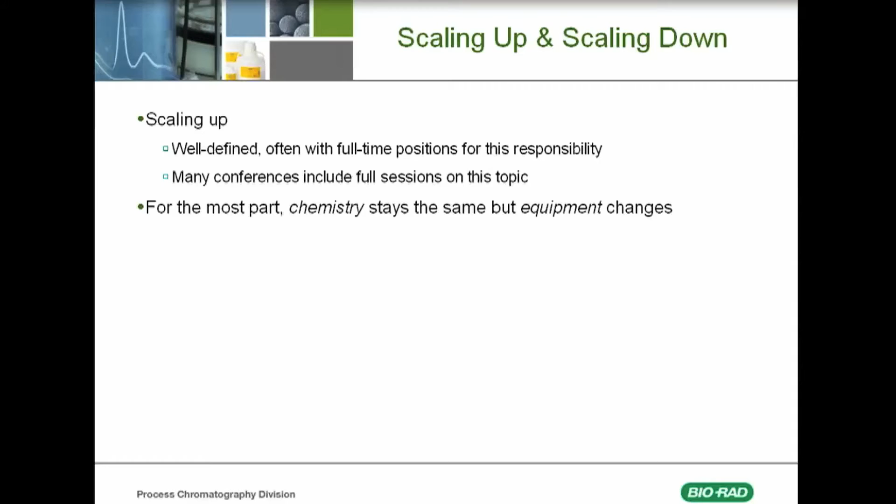And let's get started. So basically, scaling up and scaling down are two things that are very important in process chromatography. And so scaling up is actually very well defined. There's a lot of full-time positions at companies for this responsibility for process transfer. And a lot of conferences actually include full sessions on this topic. So for the most part, the chemistry stays the same, so the resins and the buffers are going to stay the same, but the type of equipment is what changes.

Once the manufacturing scale is licensed, the small scale needs to mirror the production parameters. This is used for discrepancy investigations and validation, life cycle validation, viral clearance validation, all of these things that are done for process chromatography. So any changes that are made at manufacturing scale need to be appropriately scaled down for troubleshooting and continuous improvement. But a lot of times the procedural differences are overlooked. This is because we know that the chemistry stays the same, and so we don't necessarily look at the procedural changes that need to be made between laboratory scale and process scale.

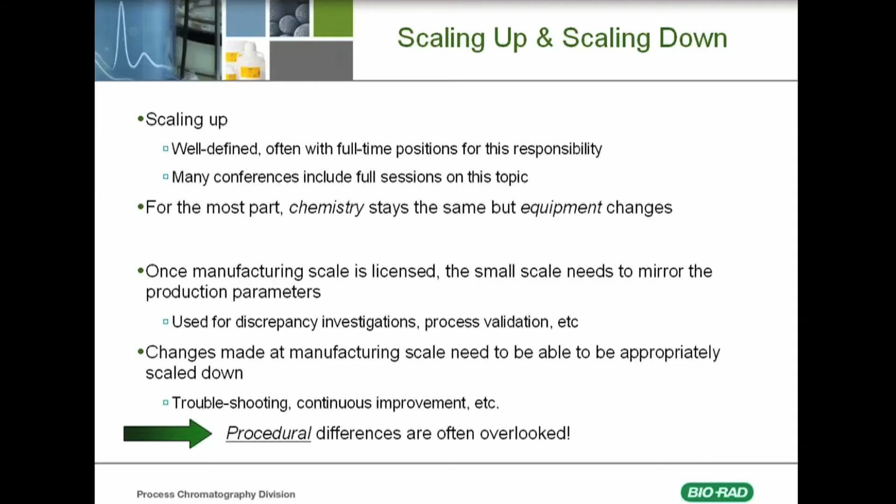But if we look at the differences, so this is scaling up from laboratory scale to pilot scale. We see laboratory scale is generally in the diameters of about 0.5 centimeters to 5 centimeters. This is always an open column system, meaning that you have to take the top flow adapter off and pour the resin in. You usually do flow packing and then just manual compression. When you get to pilot scale, this is up to about 20, maybe a little bigger, centimeter diameter, depending on the size of your process and how many kilograms you're processing at a time. But the procedure is essentially the same. You have to take the top off and pour the slurry in and do flow packing with manual compression.

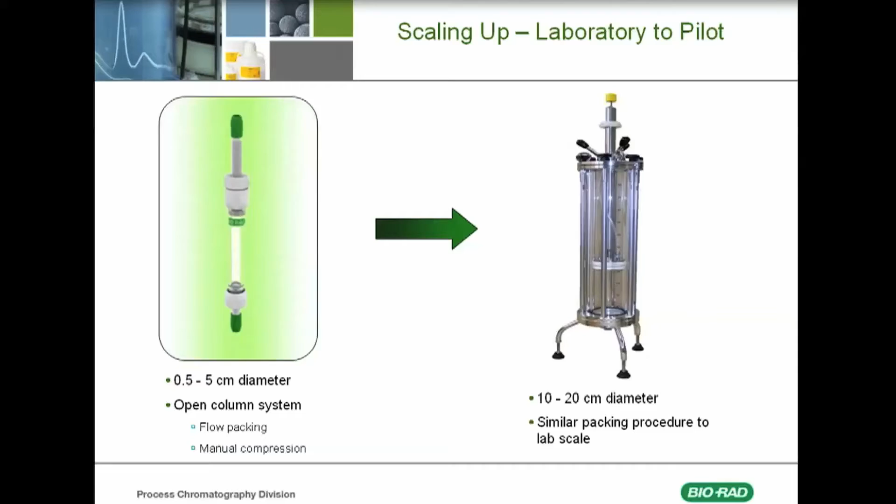So on the left we have the same thing. You have a little bit bigger pilot scale. It's still an open column system. But then when you get to manufacturing scale, you can get up to 2 meters in diameter. And at this scale, you're going to typically see pack-in-place technology, which means that the top piston is not removed. This is for a number of reasons. It can be very heavy. Oftentimes you need a hoist for that, and a lot of companies don't have hoists in their manufacturing area. Also, a lot of times people want closed systems, so you don't want to be taking the top off in a processing area.

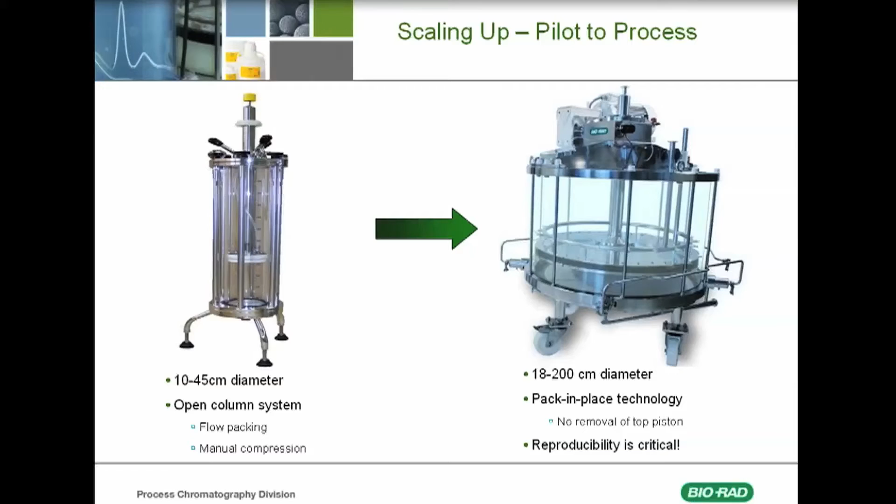The second issue with process scale is that reproducibility is really critical. It's less critical at pilot scale and laboratory scale because you're only doing a few runs. So the bed may not need to be stable for that period. But at processing scale, you're looking at doing anywhere from 10 to 100, sometimes 200 runs on a single pack of a resin. So reproducibility is very critical at this point.

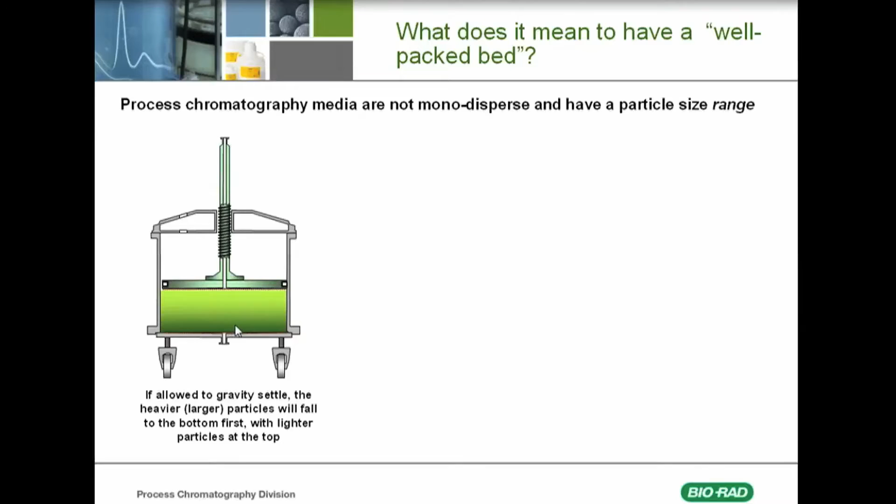So what does it mean to have a well-packed bed? Well, as we know, the media that's used for process chromatography is not monodisperse. So there's always a range of particle sizes. We have heavier particles and lighter particles. So if these are allowed to settle, the heavier particles will fall to the bottom. And you can see this is a slightly darker shade here on the bottom, and the lighter particles on top.

The flow direction for most process columns is going to be in the axial direction. Axial means it's up and down rather than in the radial direction from side to side or from the center to wall. So if we're doing upflow at any point, some of these particles can shift and you can have movement within the bed if it's not well packed.

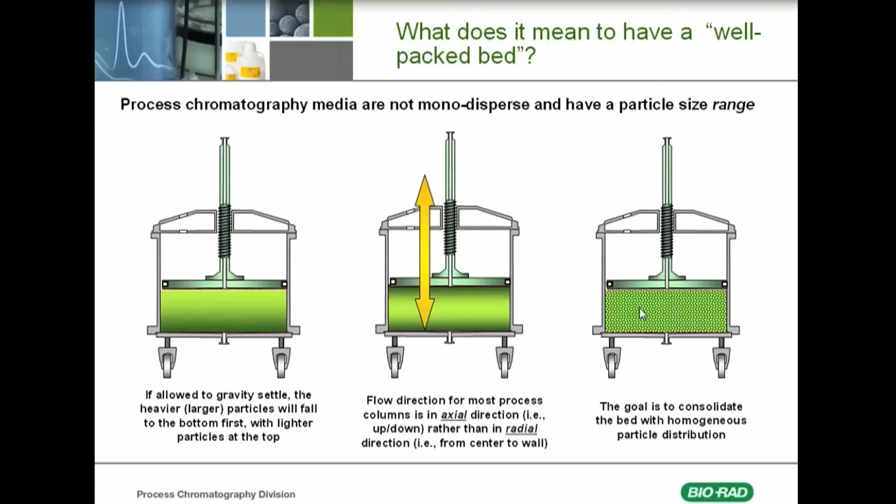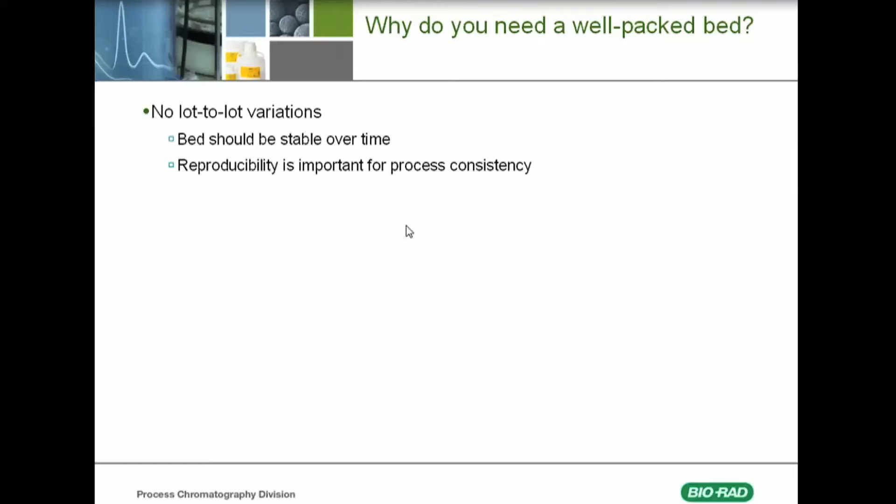So what does it mean to have a well-packed bed? Well, the goal is to consolidate all of the media so that it's homogeneously distributed between the top and bottom and from center to wall. So why do you need a well-packed bed? Well, as we said before, reproducibility is important for process consistency. You don't want lot-to-lot variations, and you don't want packing-to-packing variations. And you want that bed to be stable over a long series of cycles.

You also don't want further compression during operation. So during the buffer cycling, or the cycle that you use the column for, you can have swelling and shrinking of the beads. If you have high salt buffers, or if you have ethanol, this can cause changes to different types of media. Also, the higher viscosity buffers, like the sanitization, the high 1 molar sodium hydroxide, can cause further compression. And so when you have the further compression, the bed then relaxes, and it can cause some variations in the packing density, or the homogeneity of the packing.

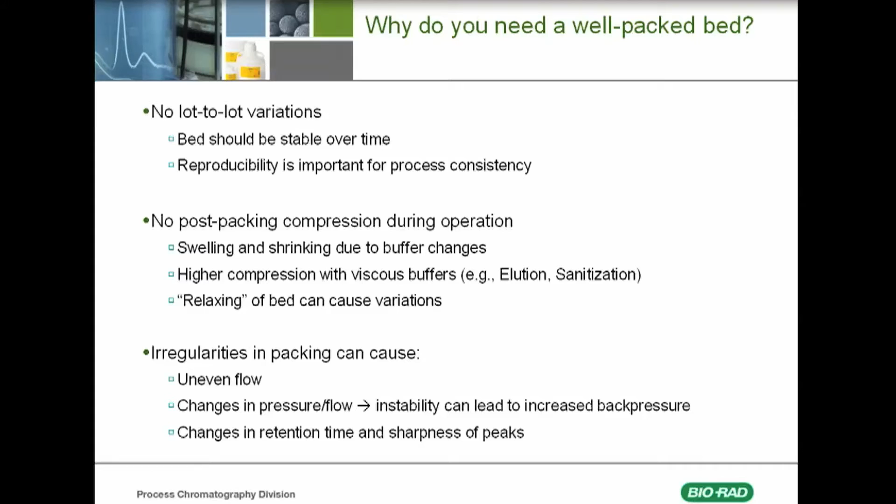The irregularities in packing can also cause uneven flow, and any changes in flow can lead to increased back pressure, which can be a problem, especially at process scale when we're typically working at fairly low pressures. And it can also lead to changes in retention time of an elution peak, and also the sharpness of the peak. So all of these issues can lead to changes in product yield and product quality. And we know that consistency is by far the most important thing in manufacturing.

So why is column packing for manufacturing considered so difficult? Well, I think by virtue of how many people we had sign up for this webinar today, it's something that's not very well known. It's not done very often. Usually it's only a few times a year, hopefully. You're not having to pack a column before every lot. There's usually very little experimentation because you're in a GMP processing area, so your quality groups and your regulatory groups aren't going to let you just have free rein for experimentation. Also, media is pretty expensive, so you can't just be doing packing studies on media and then throwing it away. You want to be able to use it.

So because of these reasons, column packing for process chromatography is often considered an art. And in almost every article that you read on column packing for manufacturing, you're going to see this phrase: it's often considered an art rather than a science. So there's usually only a few people in the company, if at all, that really have an understanding of column packing.

And if you have any constraints at all, if you have a different type of column, or maybe the ceiling height in your processing area is a little lower than what you would like, the equipment footprint, how big your pump is, the range of flow rate, all of these things that you may not have what the vendor considers ideal for packing. So you may have to make some modifications. Finally, there's a lot of new types of media that are out on the market now, and the base bead really can make a difference as far as how to pack. So there's no universal procedure for packing chromatography media in general.

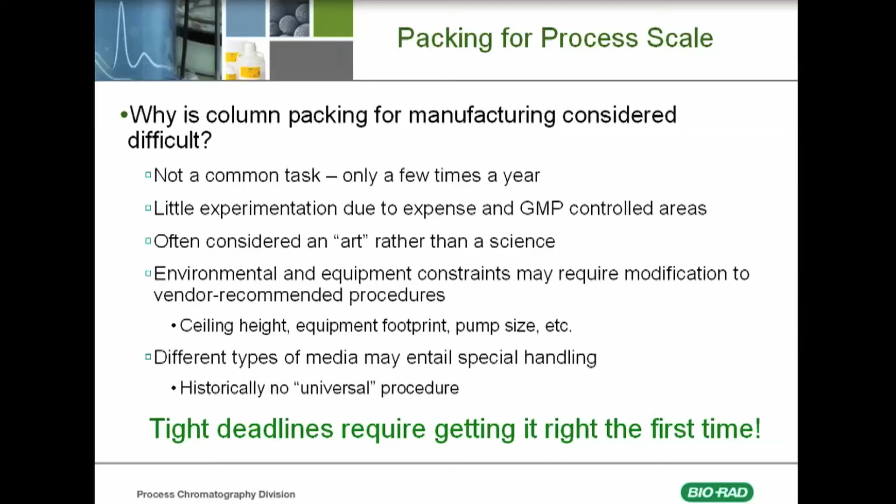Finally, tight deadlines always require getting it right the first time. So this is often overlooked when you're getting ready for your processing. You've got everything in place. You've got your buffer validation done. You've got your elution profiles that you need to look at, and you save the column packing until the last minute, and it needs to get done right the first time. You don't have time for repacking.

So how do you get a well-packed column? Well, there are a lot of equations and theories and publications that discuss the science of packing, like I said. A lot of these are academic in nature to understand the physics of column packing. In fact, a lot of these articles that you can find are actually in regard to HPLC columns, where it's very critical to have a well-distributed bed, but it's also not necessarily helpful when you're talking about packing a column in a manufacturing area.

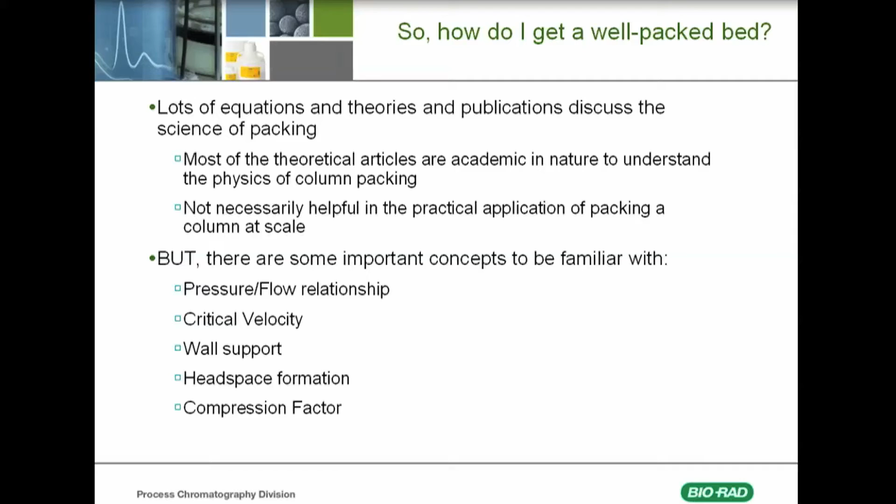But there's a few concepts that I do want to go over so that we're all sort of on the same page. A little bit of this might be old news to you, but some people may be seeing this for the first time, so I want to make sure that we're all on the same page. We want to talk a little bit about pressure flow, what critical velocity is, what is wall support and what does that mean, and then headspace and compression factor.

Now, this is typically done by your manufacturer. You don't want to be doing this in your processing area to find out what the critical velocity is in your column on your equipment, and the reason for that is for a lot of media, the high back pressure can cause irreversible damage. So this is typically done by a media vendor in order to know what the critical velocity is.

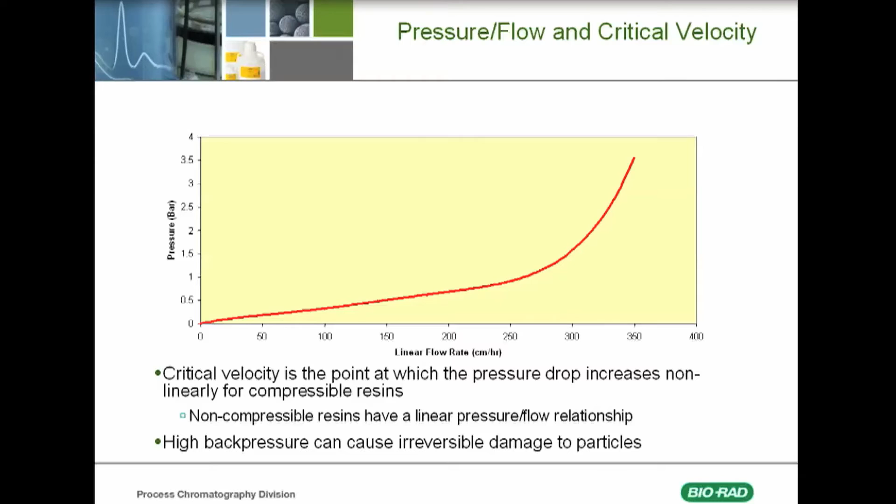This is a study that was done a number of years ago, over 10 years ago. It's referred to a lot, by Stickel and Fotopoulos. And what they showed was that as you increase the diameter of the column, you decrease the wall support. So that means in a small column, laboratory column, there's more surface of the media that is in contact with the wall. Now the wall provides support, and so actually you have better pressure flow attributes at smaller scale than you do at larger scale.

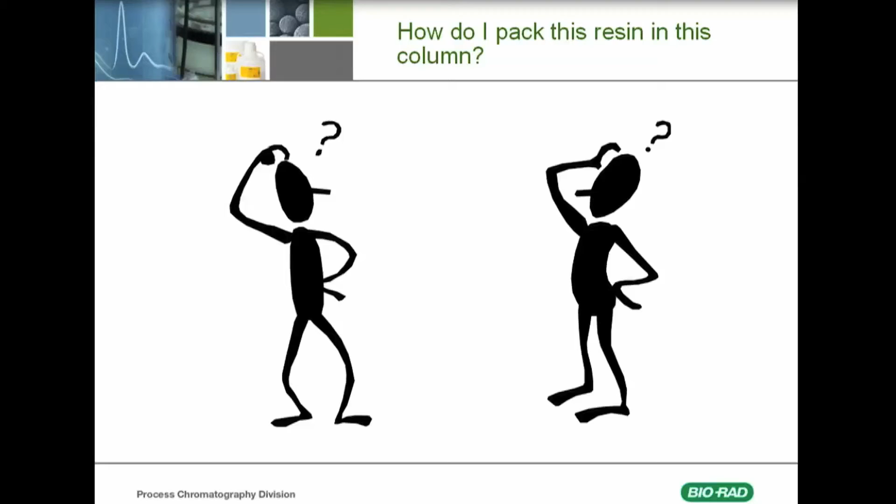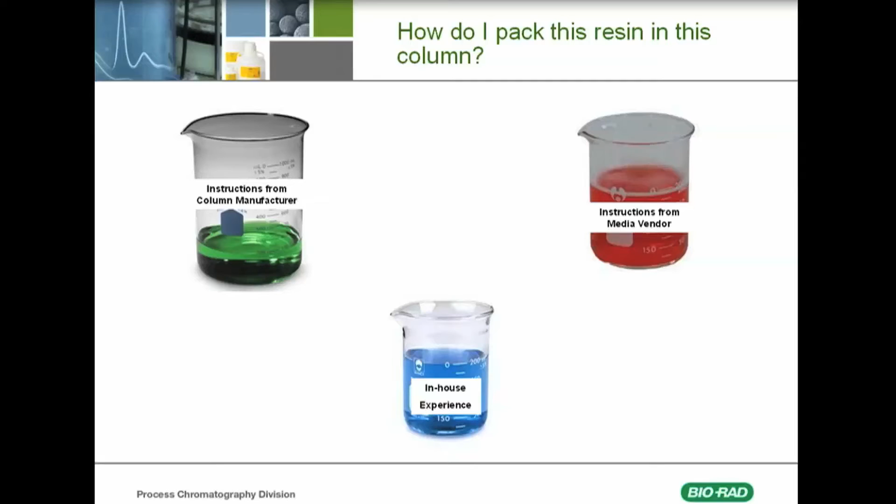So how do I pack this resin in this column? You're scaling up, you've got a piece of equipment, and you've got some resin. Well, you typically take whatever instructions you get from the manufacturer of the column. Usually the media vendor will have some advice for you as far as how to pack that media in a production scale column. And sometimes you've got a little bit of in-house experience, somebody that's packed a lot of columns at the manufacturing scale. And you mix those all together.

And you cross your fingers, and then you hope that you get a procedure that works right the first time. Well, that doesn't often happen. It takes a lot more preparation than that. So historically, what companies have done is they've used flow consolidation. So you hear this a lot, and in my research for this presentation, I found a lot of different types of advice.

So some companies say shoot for up to 3 times the maximum processing flow rate. So let's say your load is being done at 200 centimeters an hour. Well, now you've got to pack your column at 600 centimeters an hour. Some of them say 85% critical velocity, or anywhere from 65 to 90% of the critical velocity.

Well, you don't know what the critical velocity is in your manufacturing column unless you actually do the pressure flow curve. And like we said, sometimes that can damage the media. So it's not recommended to really do that in your column. There's also recommendations to use a pressure set point to compress the bed. So you often see, make sure that you use 4 bar while you're compressing the bed.

Finally, you also see packing in buffers which can cause maximum shrinkage. So for a lot of media, ion exchange media, typically 2 molar salt is a buffer that will make the beads shrink the most. This is so that you're packing it as tightly as possible. And when it goes into a different buffer, like an equilibration buffer, and it swells, then it's not going to produce any headspace.

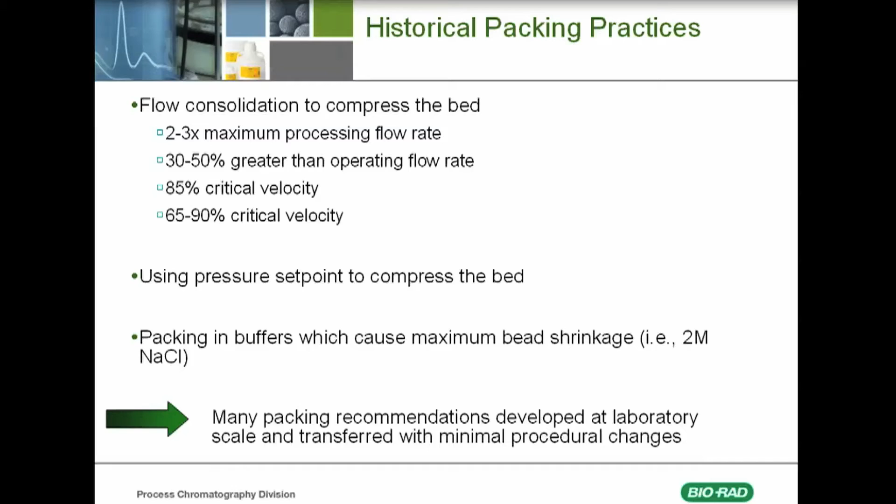Well, a lot of these packing recommendations are actually developed at laboratory scale and then transferred with minimal procedural changes because there's very little understanding of what the dynamics are at process scale.

So in flow packing, which is probably the most commonly used, especially for pilot scale, we're just going to go through this very quickly. I'm sure many of you have already performed this type of packing, but you take the top flow adapter off, and you just pour the slurry into an open column. And then once it starts to settle a little bit by gravity, you put the top adapter back on, and then you consolidate by flow.

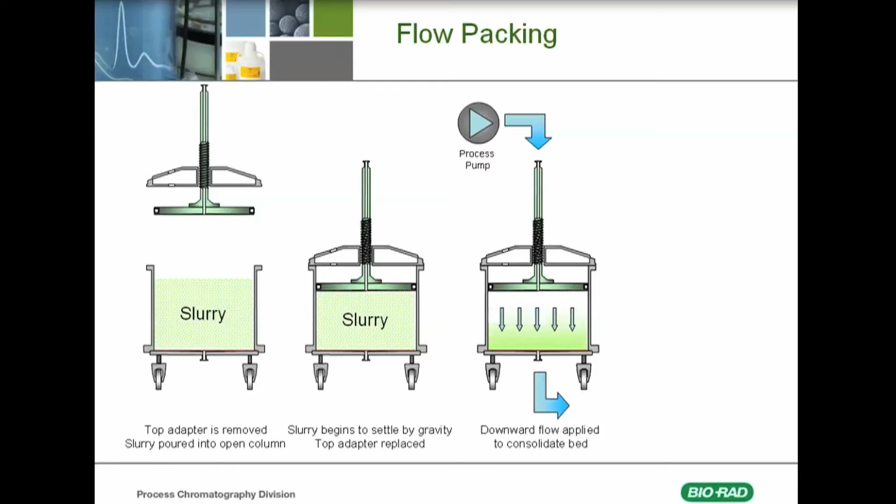So you have a process pump. It's usually a type of skid, or sometimes you can use just a separate pump, and you apply downward flow in order to consolidate the chromatography bed. Finally, you move the piston down. It's usually done manually with a hand crank, and it often requires several cycles. So sometimes you have to apply flow and then lower the piston, apply a little bit of flow, lower the piston, and it needs to be done in several cycles. It's rarely done in one step.

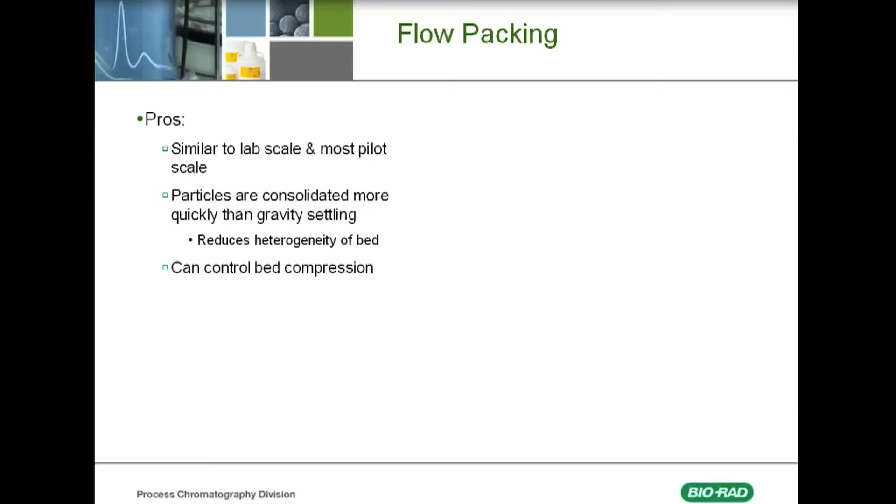So what are the advantages to flow packing? Well, it's very similar to lab scale, and most pilot scale is performed this way. In general, you have a more homogeneous bed than if you just let the particles gravity settle, and you can control the bed compression. So there's some good advantages. There's also a lot of disadvantages.

So for instance, as we discussed earlier, it's very difficult to remove the top piston when you get to the larger scales. Like I said, you may need a hoist, or you may need several strong people to lift that top, and then strong people to put it back on. Also, you have the gravity settling that happens in the meantime, which can cause some heterogeneity in the bed.

As we said, if you're using 2 to 3 times the maximum processing flow rate, up to, let's say, 600-700 centimeters per hour on your column, most skids that are made for a certain processing range aren't going to be able to go that fast. So you may need a larger pump than your processing pump.

The other issue is that when you get to these higher flow rates, you can get much higher back pressure. So in the example that I showed earlier, the critical velocity was reached at 250 centimeters an hour; for some resins, the critical velocity isn't reached until well over 1,000 centimeters per hour. So I don't know very many companies that have pumps that can operate at that speed. It's pretty rare.

Next issue is that some of the flow adapters for these types of columns are optimized to have evenly distributed flow when it's close to the bed. So it needs to be close to the bed in order to have nice uniform flow. If it's not close to the bed, usually you'll have more flow coming from the center where the central distributor is.

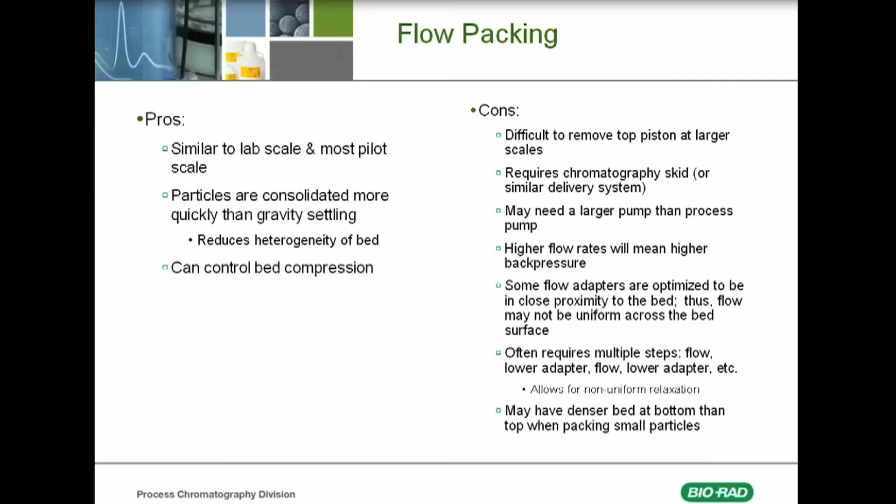So the next type of packing that was introduced at process scale when columns started to get bigger and bigger is stall packing. And this is probably well known to a lot of the people that are attending. It essentially involves having a fixed height adapter. So you start with the piston in place at its bed height. So if you want to pack to a 20 centimeter bed, for instance, you would set the adapter to 20 centimeters. You have a slurry tank, and it's attached to a diaphragm pump and a pressure gauge. And there's generally two different ways to introduce slurry into the column.

You can go through the bottom or through the top. In this example, I have the slurry tank and the diaphragm pump attached to the bottom. And there's a central nozzle that comes up out of the bottom of the column or out of the top. And then the slurry is pumped through the diaphragm pump, while the resin is trapped by the frit, and the fluid or the flow comes out the top.

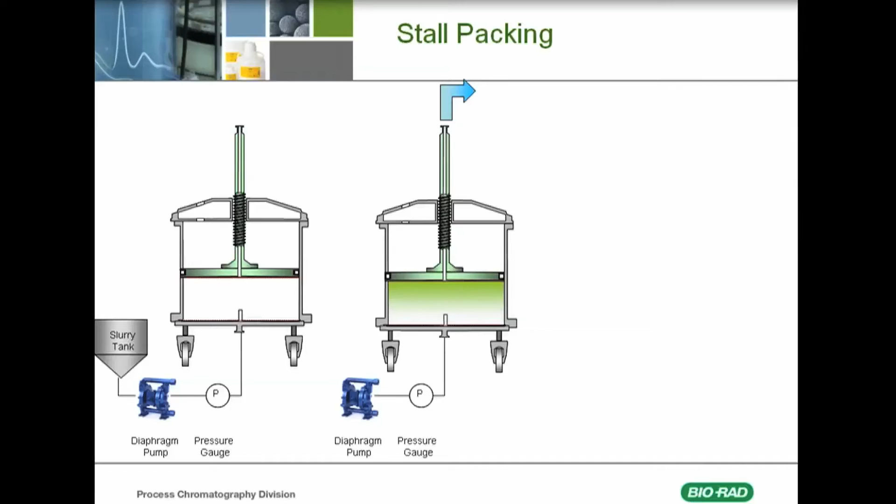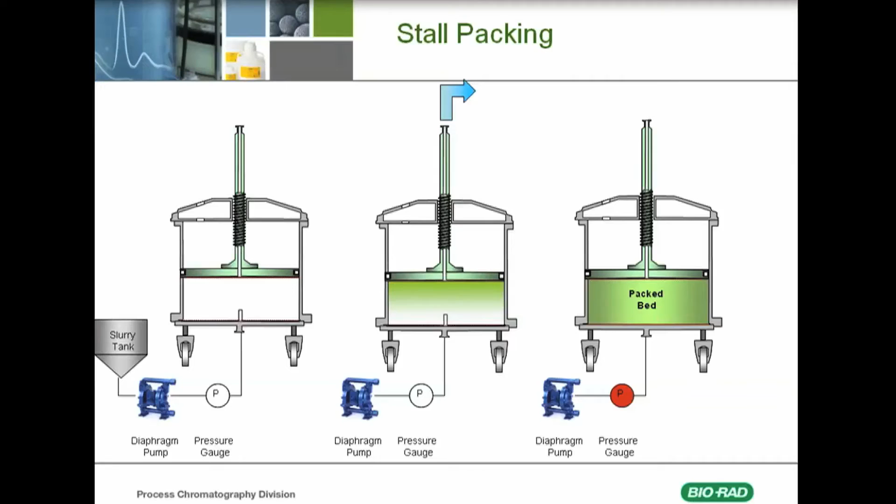It's often done from bottom to top in order to be able to remove any air that may be entrapped under the frit. So this is usually the most common type. And then when the pressure gauge overpressures, you know that you have a packed bed. This is the general type of stall packing. There are some variations, but this is just the general method.

So there are some advantages to stall packing. As we said, it's generally a fixed bed height, so the column tube height is limited. That means that you don't really need a very tall ceiling in your processing area. It's only one packing step, so you don't have the multiple flow, lower the adapter, flow, lower the adapter, etc. It's only one packing step, and that can be automated.

The packing pressure, so the pressure at which you set the pressure gauge to overpressure, can be varied depending on what the media characteristics are. So if you have a media that needs to be tightly packed, you can go to a higher packing pressure than one that doesn't need to be, that has a lower compression factor. It's a really fast process. If you've ever done this, it's generally like 5 minutes or less because it uses a very high velocity.

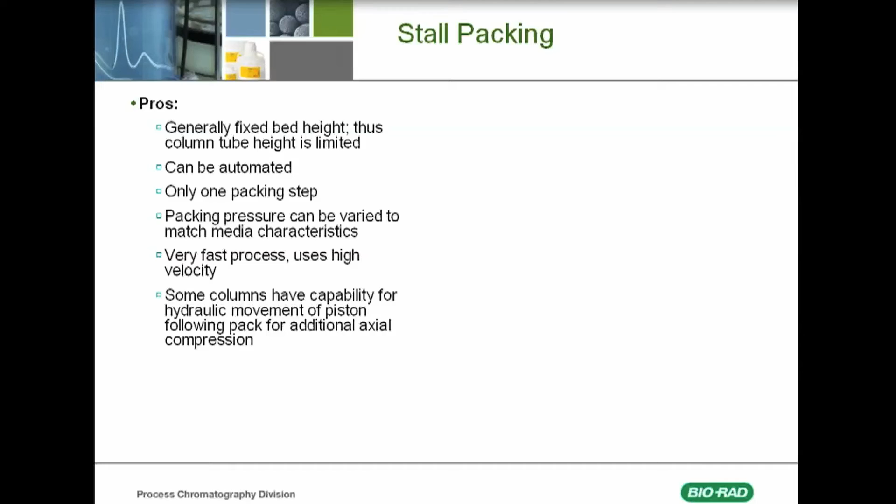Some of the more recently designed columns within the last 5 to 10 years have the capability for hydraulic movement of the piston following the pack for additional axial compression, but this is generally kind of clunky. It's not very precise, and it's not very smooth for the most part. But you can do additional compression.

So what are some of the disadvantages? Well, it doesn't scale very easily. Actually, since you have that central nozzle delivering media to the sides of the column, a lot of times there's very big differences seen between, for instance, a 45 centimeter column and a 60 centimeter column, which is not a very big difference in scale, but can really change your packing procedure.

The diaphragm pumps can also cause some damage to the media, not necessarily one time through the diaphragm pumps, but a lot of these procedures for these types of columns call for recycling the slurry through the diaphragm pump in order to prime the lines. And for some media, this can be damaging and can cause fines.

For stall packing, you also need to use a pretty thin slurry, usually less than 30% for this type. And so that means you need a larger slurry tank and more buffer, which generally just means more money and more footprint in your processing area. You also need a media overage, so you can't deliver the exact amount. Most procedures call for 5 to 10% media overage, and the media can cost a lot more than the column itself. So this can be a problem for companies that are trying to economize.

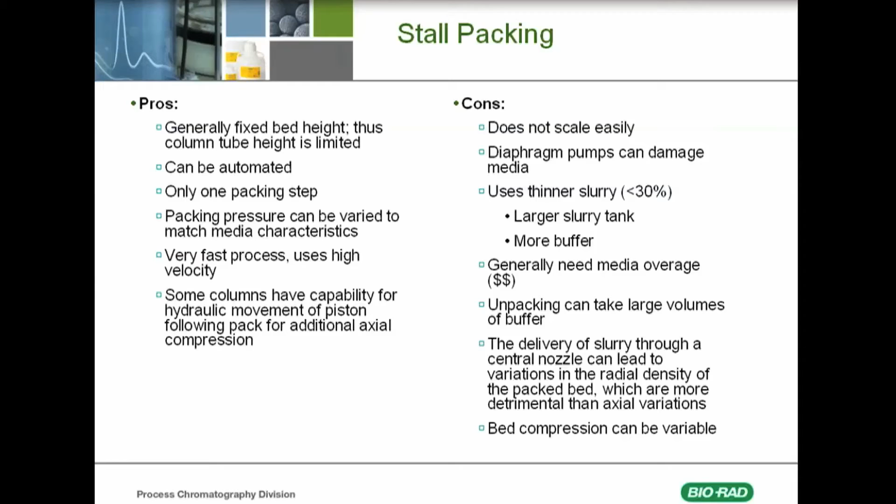One of the most important things is that the slurry is going through a central nozzle, and so it's delivering from the center out to the sides, the walls, and this can lead to variations in the radial density, which is from center to wall. These are far more detrimental than any variations in the axial density of the beads, and so if you can imagine, if you have a void somewhere in that area or a denser region, those can all cause shoulders or double peaks, things like that. Finally, the bed compression can be really variable, and I'm going to explain why that is.

If we look at the next slide, this shows us the difference between consolidating a bed with constant flow versus constant pressure. So on the left-hand side, if we have the same flow, we see that the pressure is changing the whole time until it evens out. So the pressure starts off very low as the bed is consolidating at the bottom. The bed is just starting to build, and as the bed grows from 1 centimeter, 10 centimeters, the higher the bed height, the higher the pressure. So even though the flow is the same, the pressure is increasing the entire time.

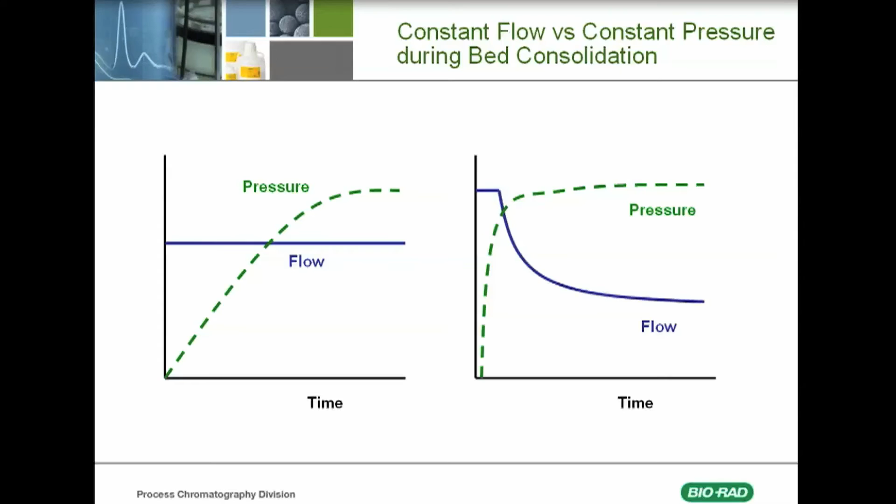On the right-hand side, what we see is that as you increase the pressure, as you maintain the pressure, the flow is going to decrease. So it's the same principle, it's just that as the bed is consolidating or as the bed is compressing, you'll see a decrease in flow.

So what have we found? The packing by pressure is actually not very reproducible. First of all, it doesn't transfer well from lab to process scale. As we see with wall support changes, the back pressure is going to change pretty significantly in some cases. So you can't transfer a process of packing by pressure from laboratory scale or even pilot scale to process scale. This is going to give you some differences in compression and differences in back pressure. There's a lot of other factors that can influence back pressure.

The particle size distribution is actually really important, and what we see on the right is the effect of particle size. Now, as I said, most process chromatography media has a particle size range for the distribution. And so even though the mean particle size might be 50 micron, that mean might be 47 or 52 or anywhere in that range. And the actual range of the particle size can be huge. It could be, let's say, 30 to 70, for instance, or even bigger.

So a very small change in the mean particle size, on the right we see 50 micron, and on the left in the pink we see 45 micron, actually has quite a big impact on the back pressure at the same flow. We see at 300 centimeters an hour, it's almost twice as great for this particular resin.

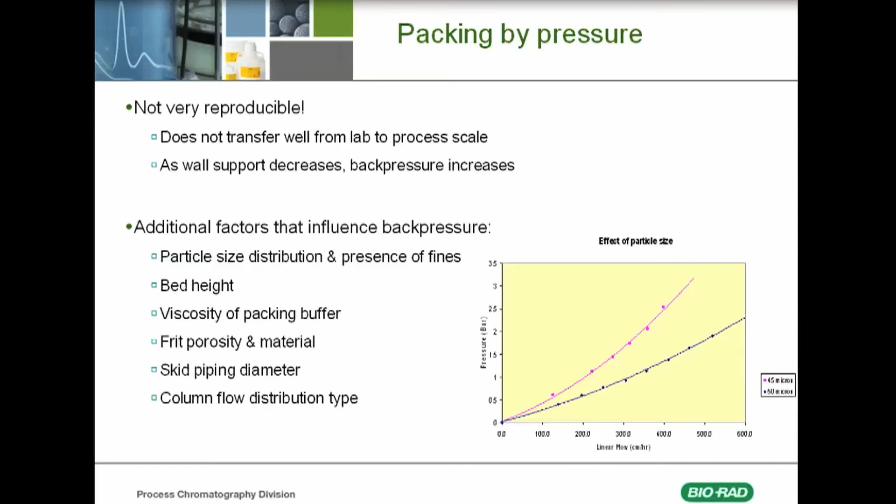The skid piping diameter, so the skid that you're attached to that's doing the flow or the pressure packing, can change from small scale to large scale. And also the distribution type, so the column flow. There's different types for different types of manufacturing columns, and that can really make a difference on your back pressure.

So with inadequate packing, we'll see further compression at higher flow rates. So we see here, starting at a little over 100 centimeters an hour, there's a little bit of headspace that starts to form. This blue line is basically the bed height of the column, which if we pack the bed to 20 centimeters and we increase the flow, we see that the bed height will decrease, down as much as 18.5 centimeters. So a loss of 1.5 centimeters, which is pretty significant. And as we said, this allows for non-uniform relaxation and can cause variations in the bed. The headspace, as we talked about, can also be caused by shrinkage due to buffer changes.

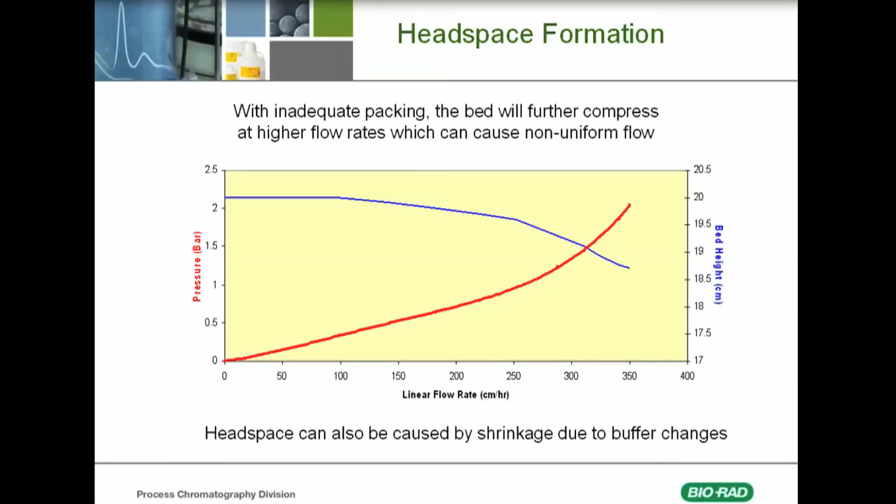So this is an interesting question, and I'm sure a lot of you have dealt with this before, but we all know how to calculate a column volume. It's just the volume of the cylinder, pi r squared times the height. So here's an example. We have a column that's 45 centimeters in diameter, and we pack it to 21 centimeters. So just by basic geometry, the column volume is calculated to be 33.4 liters.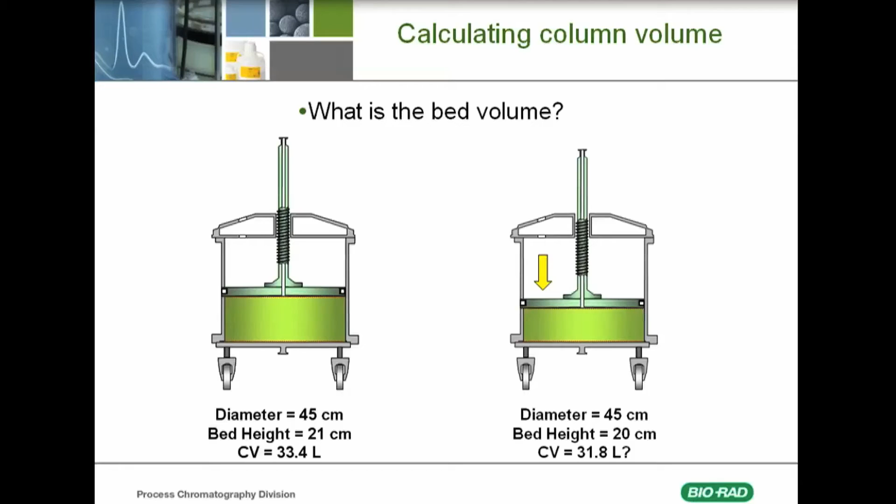Well, let's say you have some high flow, you have a little headspace, or maybe your asymmetry is tailing, and so you decide that you need to compress the bed a little bit more. So you just lower the piston a little bit. Now it's 20 centimeters instead of 21. You haven't taken any resin out. You haven't changed anything inside the bed other than the compression. But now your column volume is calculated to be 31.8. So what's accurate here? What's the most accurate thing that we can describe when we're writing in our SOPs and submitting documents to our regulatory agencies? How do we define this? It's a pretty commonly asked question.

So, is there a better way to pack the column? Well, what we've shown is that packing by pressure or flow can lead to variance in bed compression and therefore variance in the column volume. This will definitely affect your packing reproducibility and your bed stability.

Correct compression is critical. As we've shown, incorrect compression can lead to poor column efficiency, can lead to changes in your elution peak retention time, also the shape of the elution peak. It can lead to changes in relaxation of the bed, uneven flow. If you're over-compressed, that can also lead to problems because that will affect your back pressure. It might also affect your binding dynamics during processing if there's any change to the pore size on the beads.

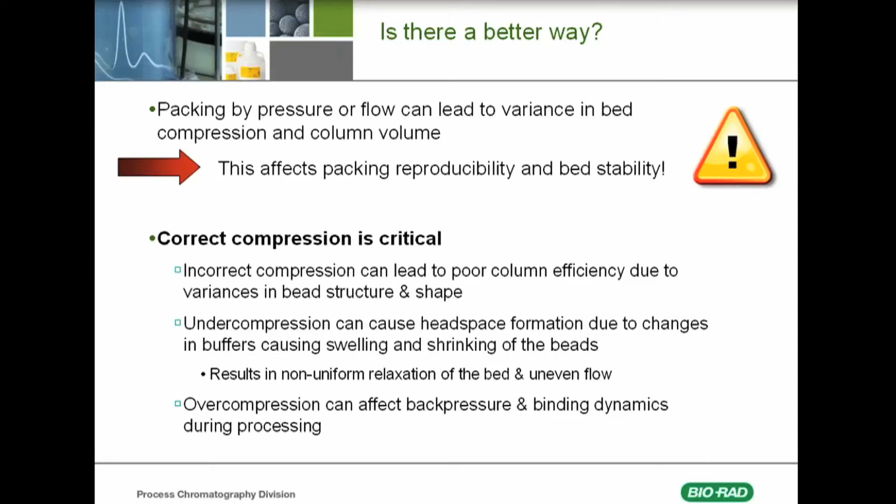So what is compression factor? Well, it's pretty simple. It's settled bed height divided by packed bed height. I usually like to remember this as SOP, or settled over packed. It's the easiest way for me to remember it, and I hope it gives you an easy way to remember it too. So, for instance, a non-compressible media will have a compression factor of 1.0. So, settled bed, 20 centimeters. Packed bed, 20 centimeters.

Anything that's compressible will have a compression factor greater than 1.0. So a lot of media is going to be in the 1.1, 1.2 range. I've seen as high as 1.6 to 1.7 compression factor, which is highly compressible media. You get this number from your media vendor, and it's usually going to give you the best performance and the best stability for a packed bed.

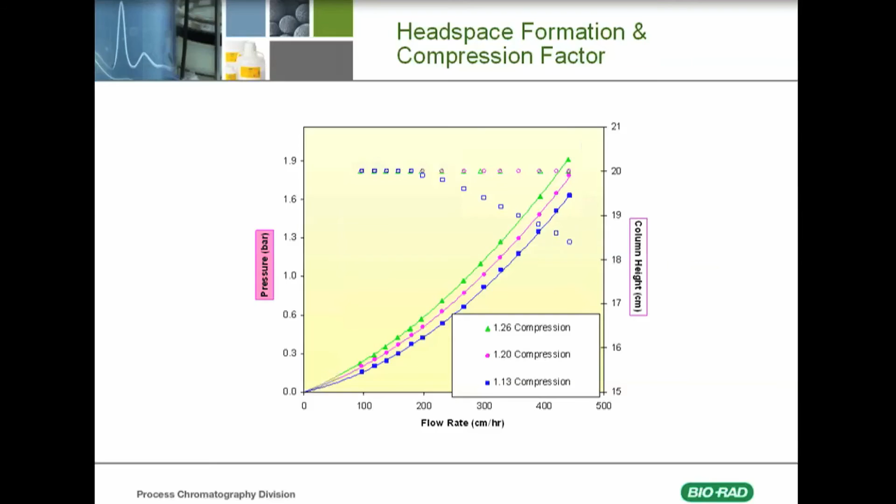Another thing to notice here is that the green curve, 1.26, gives a little bit higher pressure than the pink curve at 1.20 compression. Now there's not a significant difference in the pressure flow curve, so either one of these would be acceptable for a packing process. So in this case, you would have a range of what an acceptable compression factor is. But you definitely want to be over 1.13.

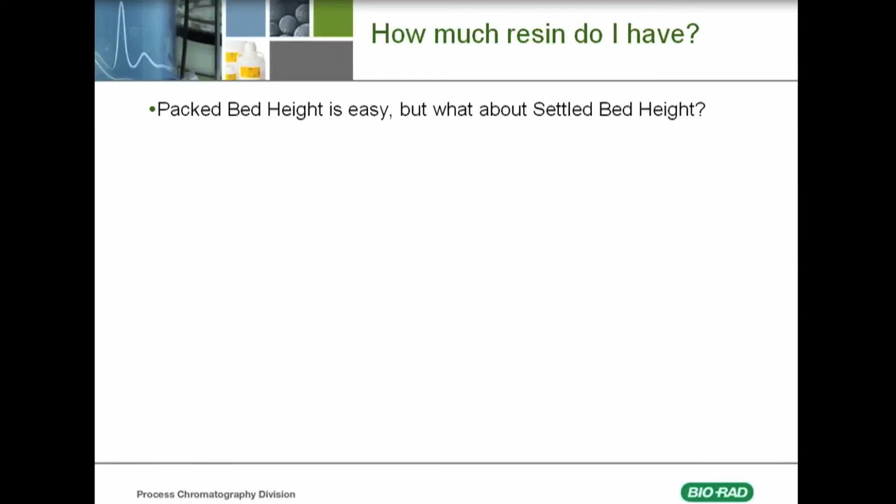So how do we calculate how much resin we have? Packed bed height is easy. As we said, wherever your piston is, that's going to define your packed bed height, right? But what about settled bed height? How do I figure out how much resin I need to put into the column? Well, using measurements from your packaging is not always accurate. First of all, most media vendors are going to put just a little bit extra into each container to make sure that they're not shorting their customers. In this case, that can result in slight overages.

Another thing is that you often have to remove whatever the shipping buffer is. So if it's shipped in 20% ethanol, that's usually not going to be your packing buffer, so you need to decant and replace with packing buffer. This might result in some loss of the slurry before you get to the packing stage.

In some cases, you may need to define the media, which means you need to take off the fines before you put it into the column. This can also cause differences in what your measured slurry volume is. So what would be ideal is if you could just transfer everything you want to pack into the column, and then you just let it settle overnight in the column. That would be ideal. Then you'd know what your settled bed height is. But it's not very practical.

There's a couple of reasons. Obviously, you'd have to repack the column. Also, you wouldn't know beforehand how much you needed to put in the column. You would just transfer what you thought you needed to put into the column. So there's a couple of different methods that are used for measuring slurry density. One of the most common is using a graduated cylinder.

So you'll take a large graduated cylinder, maybe a liter or a 2-liter graduated cylinder, and just transfer a section of the media or the slurry into the graduated cylinder, and then you let it settle. Well, for some media, this might take overnight, especially high-performance media, HP media. It can take a really long time to settle. Also, the wall support, because the graduated cylinder is much smaller, may introduce variance. Not much, but a little bit. So it's not very helpful because you don't really want to take a long time to let your resin settle.

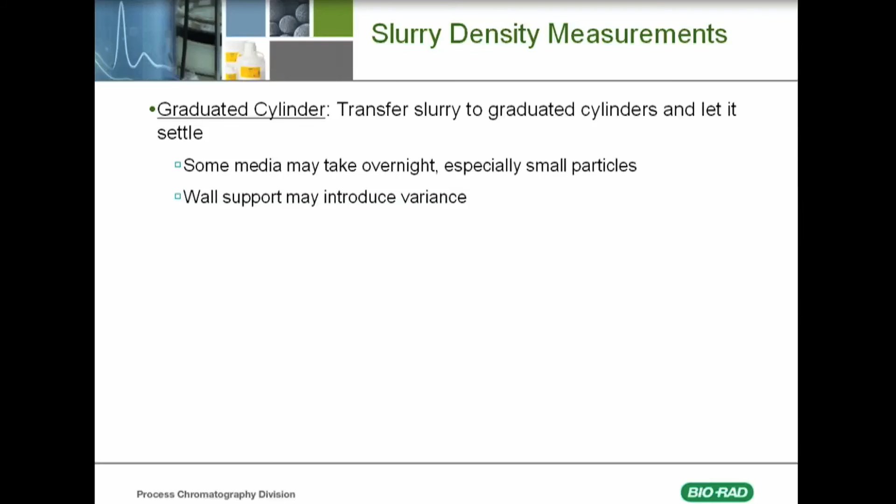There's also a method called the rebound method, and in this case what you do is you would transfer the media into the column and apply flow or axial compression. Then you'd stop the flow, allow the bed to relax, and record the rebound height. This is helpful for some media, definitely. It's clearly not possible in a stainless steel column because you can't see what the height of the bed is. It's also not predictive, as I was saying in the case of the first method. You have to transfer everything first. So if you transfer everything and you have 10 liters more than you wanted to have in there, then you've got to start over again.

It's also not very practical for highly compressive media. The media that I was talking about earlier that has a very high compression factor, once you start applying compression, you cannot stop applying compression. It really leads to big voids in the bed, and a lot of variations in flow. So it's not always accurate for some types of media. Useful for some types, but not all.

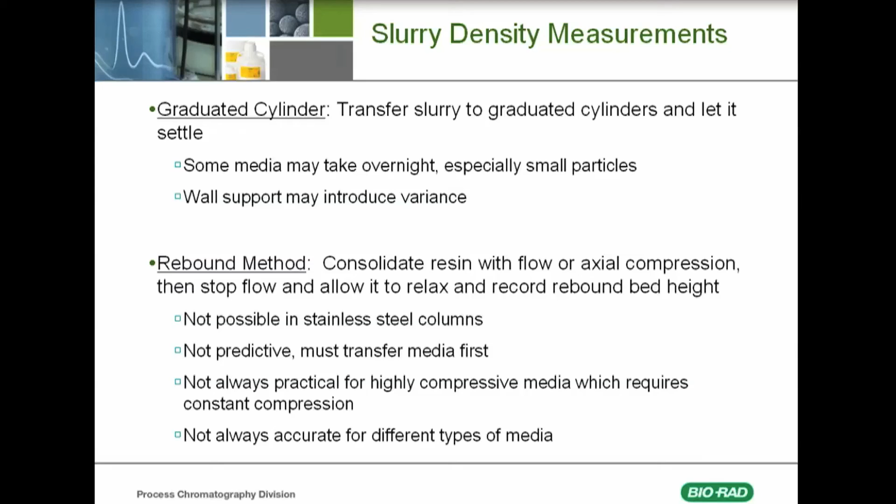There's also the centrifuge method. So what you do is you take a small portion of the slurry and put it into some spin concentrators, and then you centrifuge the liquid out. You weigh the liquid and the slurry separately on a small balance. And in this case, what you would do is convert the gram per gram percentage to volume per volume percentage. This can actually be quite accurate, but you have to do the conversion factor beforehand in a laboratory in order to correlate the gram per gram percentage to volume per volume percentage.

Finally, this also requires additional equipment in the processing area. A centrifuge is not something that's very common in a purification area, so it's a little difficult to use that across the board.

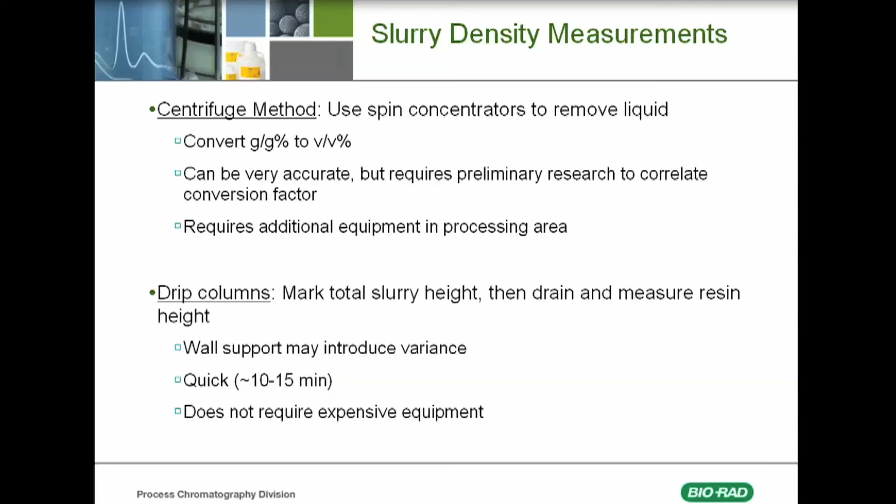One thing that we use quite frequently here at Bio-Rad is a drip column. So basically, you would take a small drip column, put your slurry in there, mark the total slurry height, and let it drain. So I'm going to show a picture of that in the next slide, but it's very quick, 10 to 15 minutes usually. It doesn't require any expensive equipment, so that's nice. You may get some variance due to wall support, but it's usually not significant.

So here's a picture of what I'm talking about. These are drip columns, so they come empty, and they come with a little snap plastic piece that snaps off the bottom here. So what you would do is dose your slurry into the disposable column, and then you mark the total height of the slurry. I don't know if you can see these little lines here where I'm marking the top of the slurry. Then you snap off this bottom piece and just let the liquid drip out. It usually takes about 10 to 15 minutes.

And when you're finished, you just measure the total height of the slurry and the total height of the resin that's left in the drip column, and divide that by the total slurry that you put in there. In this case, we did it in triplicate, so you see there's slightly different values here. This one on the left is a little bit higher, and that has to do with the sampling procedure and so forth, but you want to do it at least in triplicate.

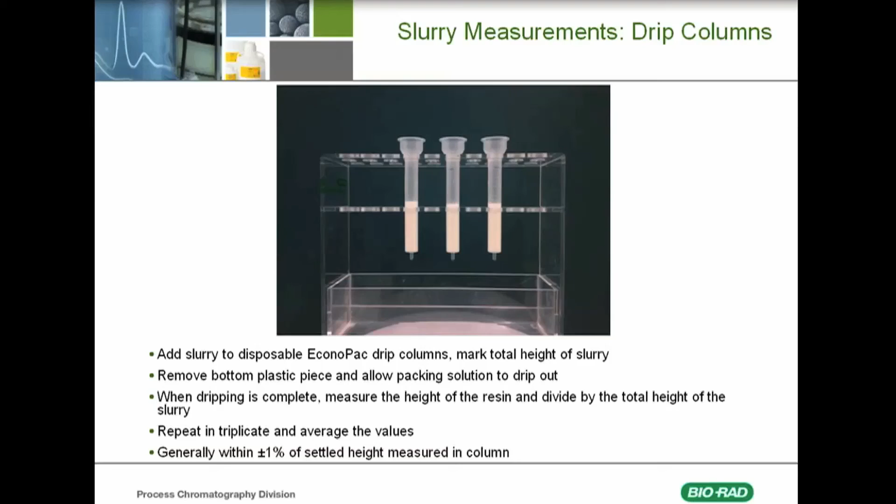And it typically gives us within plus or minus 1% of what we measure in the column when we actually let the resin settle overnight. So this is a nice, effective way to do it. It doesn't require expensive equipment, and it's pretty quick. So once I know my slurry density, how do I develop a packing method?

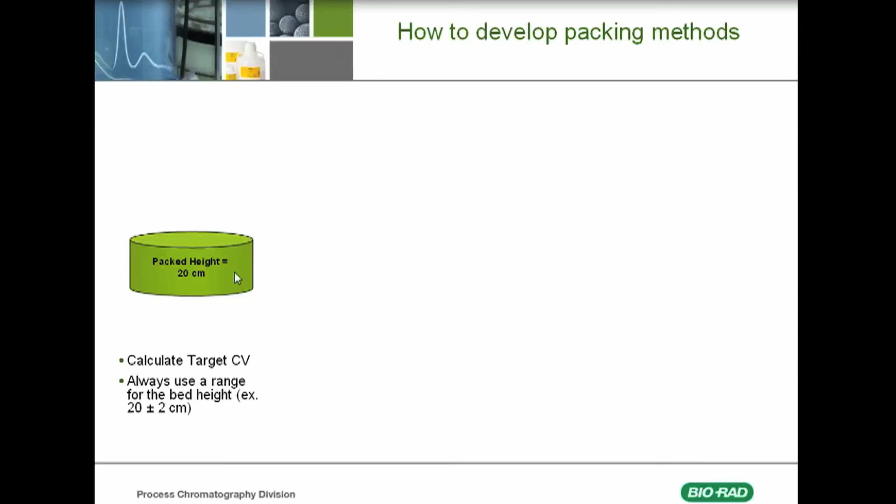Well, first you calculate your target column volume, and we always recommend to use a range. 20 plus or minus 2 is a pretty common range. So then you have to know what the compression factor is for your media. For this example, it's 1.20, and so you calculate the amount of resin that's required. You multiply the target column volume by the compression factor.

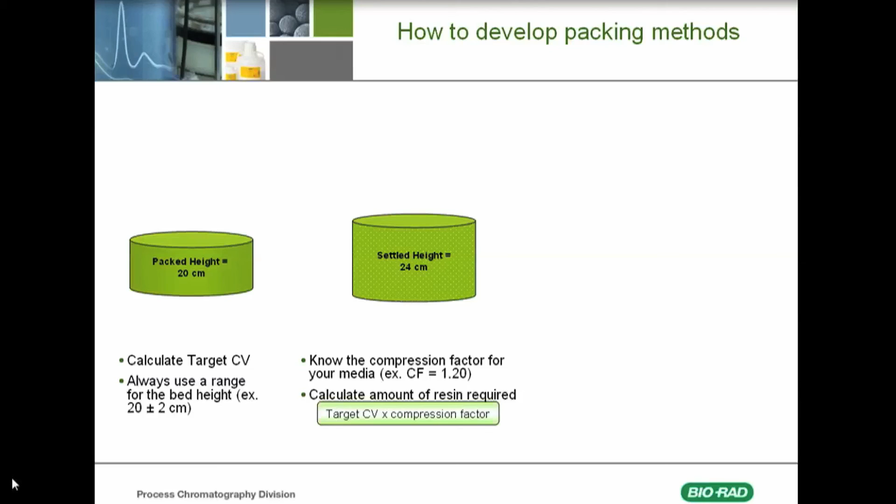And we're not going to do column volumes here. I can just do height. So if your packed bed height is 20, then your settled bed height should be 24. It's just 20 times 1.2. And then you determine your slurry percentage. So let's say it's 50%. We'll make it very easy.

And then you calculate the amount of slurry to transfer into the column. So in this case, the slurry height, the amount to transfer into the column, is 48 centimeters. It's the amount of resin required divided by the slurry percentage. For dynamic axial compression columns, what you do is transfer that amount of slurry into the column.

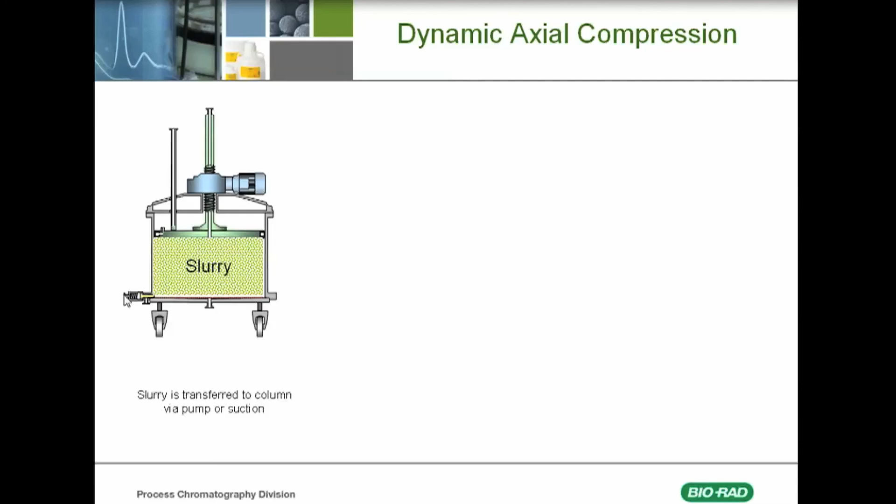And you can transfer this slurry via suction, where you start with the top piston all the way down at the bottom and move the piston up slowly. In this case, in the Bio-Rad case, the slurry valves are on the side of the column. And so the slurry enters through this valve on the side while the piston is being moved up.

Once the slurry has been completely introduced into the column, you close the slurry valve and you start moving the piston down. The piston is controlled by this motor on the top here. Both the height and the speed of the piston are controlled by this motor. And really, the only critical speed is that it needs to be faster than the gravity settling rate of the media. So in most cases, this is going to be less than 300 centimeters an hour.

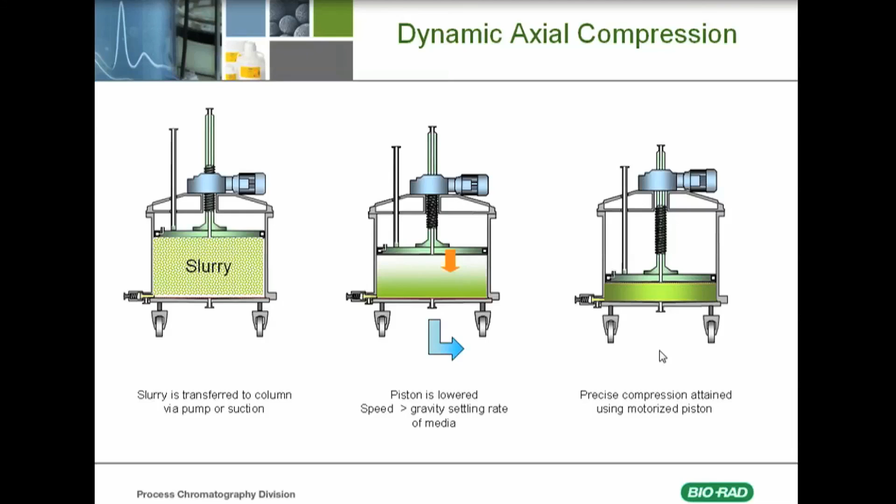And you can do this with the top closed and the bottom open so that the liquid packing buffer comes out the bottom. And then you go to your precise compressed bed height using the piston. So a couple of points about this. It's really ideal for compressible resins. It doesn't require high flow or high pressure. You can do this at very low pressure and really with no flow at all. The only flow is determined by the movement of the piston.

As I was saying, the initial step when you consolidate the media into a bed needs to be performed at a speed higher than the gravity settling rate. Most resins are going to settle at 100 to 200 centimeters an hour, maybe even less for high performance resins. So really, it's only the elasticity of the media that's going to provide resistance during the axial compression.

So the final compression, after the bed has been consolidated and you're moving the piston into the bed, can be performed at a really slow speed, like 50 centimeters an hour. It doesn't need high flow. It doesn't need high pressure.

The other thing about dynamic axial compression is it's actually ideal for incompressible media. This is because the consolidation of the bed is performed with uniform plug flow. What that means is that you don't need to use the flow adapter or the high flow through the skid. The movement of the piston down gives uniform flow across the bed. It's just a plug moving down.

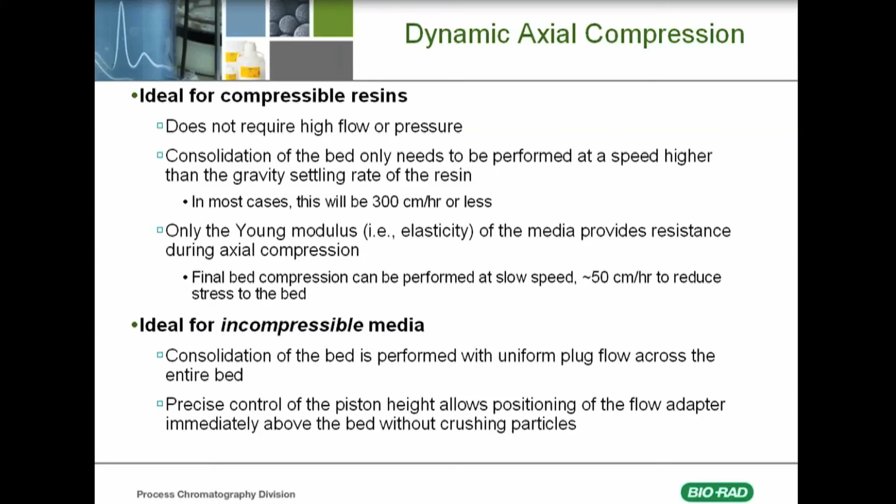Secondly, since you have really precise control of the piston height, you can position that flow adapter immediately on top of the bed without pushing into the bed and crushing the particles. So what are the pros of using a dynamic axial compression column? Well, it's a very versatile column design because it's easily scalable. The same principle is used at 5 centimeters as at 2 meters.

Secondly, you also get improved bed homogeneity, since there are no flow changes, flow variabilities, or radial variations in the bed. It's also a very fast process. It's only one packing step. You have basically a slurry transfer step and a packing step, and that's it.

Lastly, this is not lastly, but it's a generally universal procedure for any type of chromatography media. There's usually very, very few changes that need to be made for this. It can also be automated to make sure that you have a reproducible process. There's obviously some disadvantages as well.

The first is you must know the exact slurry percentage. This means you have to deliver a very accurate volume of slurry, but in chromatography processes, we can be accurate. It's not difficult to be accurate.

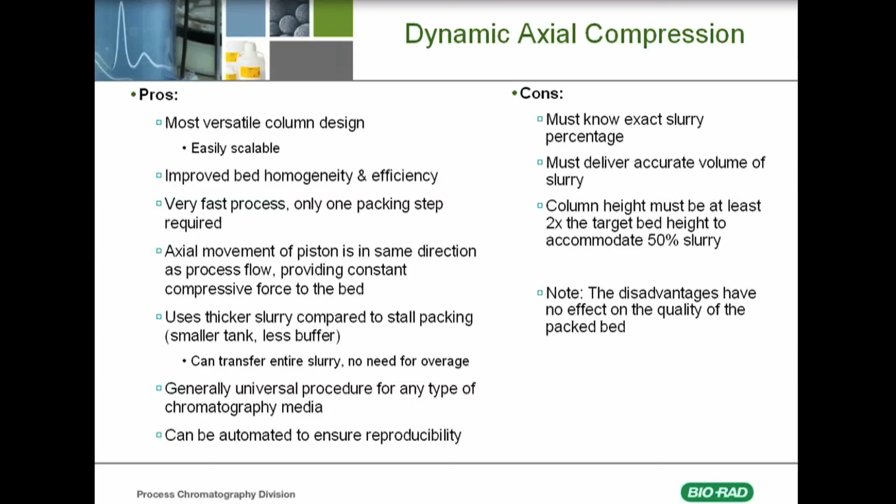Historically, we've used asymmetry and number of plates, or number of plates per meter, or just HETP. Number of plates per meter and HETP are all dependent on what the bead size is. So HETP could be 0.013, or it could be 0.056, and you don't know how to compare those numbers because it's really going to be dependent on what the bead size is.

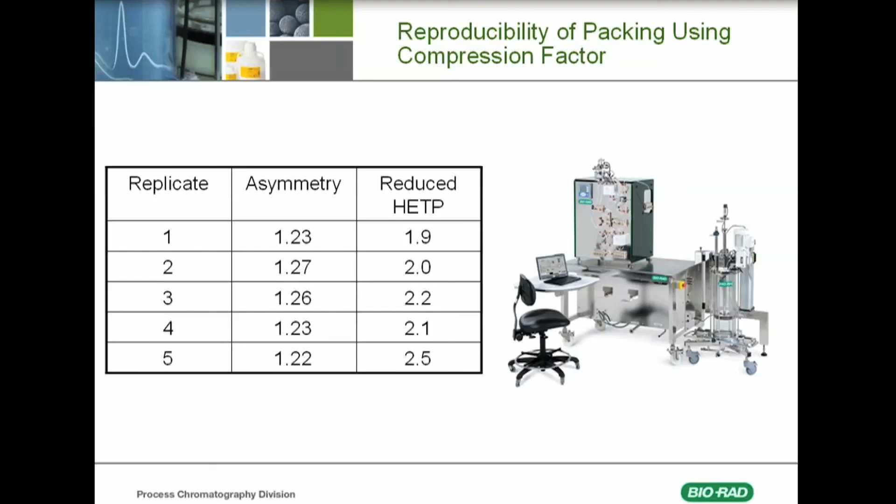Now, generally, anything under 6 or 7 for a reduced HETP is going to be a good value. And this is true for any size bead, any size media, any column, and you can apply this number pretty universally. I do want to make a couple of comments about asymmetry testing.

First of all, asymmetry and HETP ranges that you see in your media instruction manuals are ideal. These are what we as media vendors can get when we pack our columns well. But they're not always practical. There's a lot of things that are going to affect your asymmetry values. The flow rate, the type of solution you use. The flow rate is actually very important in this case.

Where the proximity of the detector is, so is it really close to the column outlet? Is it further away? Where is the injection done? How is that done? Do you have to stop the flow before you do the injection, etc.? All of these things can affect your actual values. So you want to make sure that you set your acceptance criteria not based on what you find in a book, but what you actually get in your processing area.

Your lot-to-lot consistency is more important than your actual values. And obviously the absence of shoulders and double peaks is important, but the overall values are not critical for most chromatography media, especially since anion exchange or anything that's using a step elution really only requires one plate in reality. So I just want to make a note that you don't always have to conform to what is provided by your media vendor.